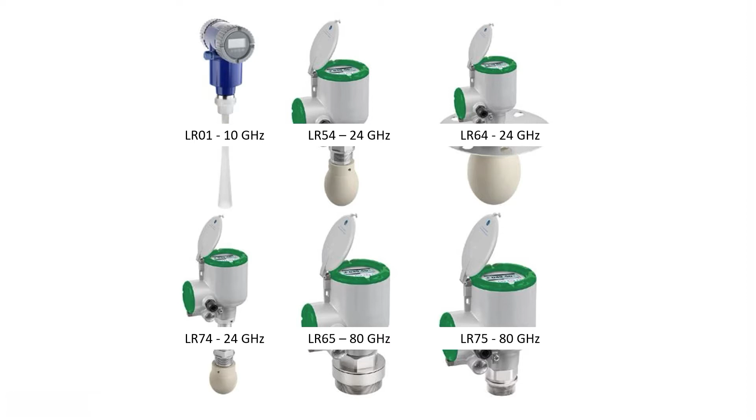Let's take a brief look at solving challenging solids level applications with Schneider Electric's LR64 and LR65 radar level controls. Why select either model for your application?

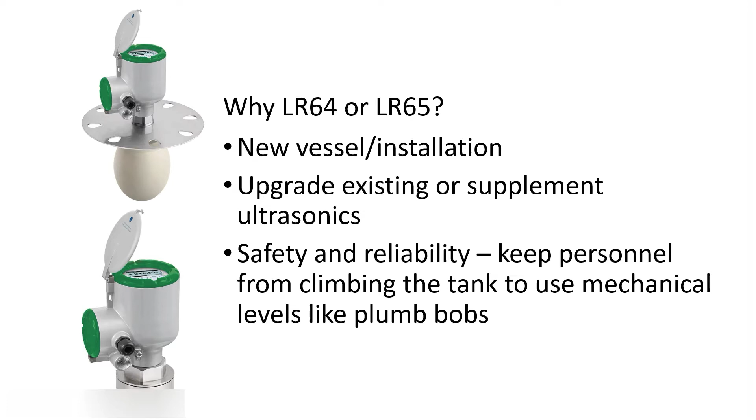Perhaps you have a new vessel? A desire to upgrade or supplement existing ultrasonics? Or for safety and reliability purposes, you want to keep personnel from climbing the tank to check level with a mechanical device. Both LR64 and LR65 use the powerful Frequency Modulated Continuous Wave, or FMCW, radar technology.

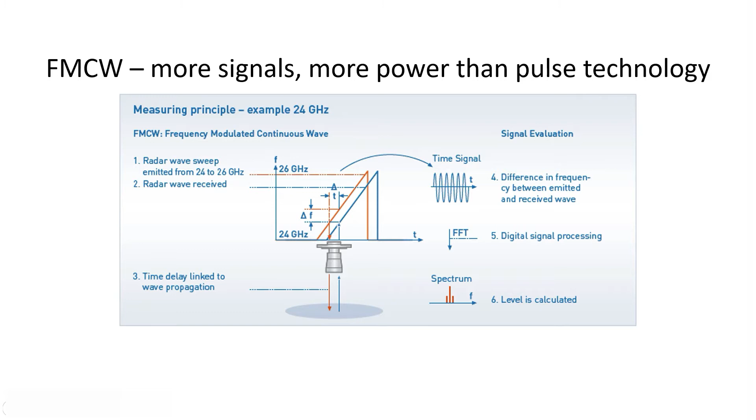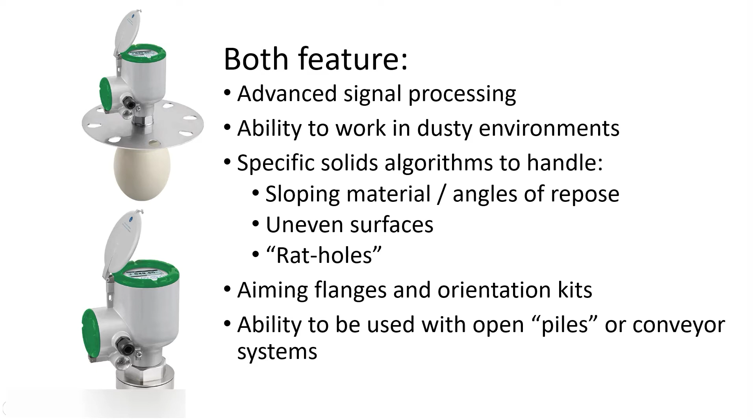Advanced signal processing and algorithms maintain accuracy despite dusty environments. A rugged design allows both models to be used in applications featuring product buildup, sloping material, uneven surfaces, rat holes, and other challenges.

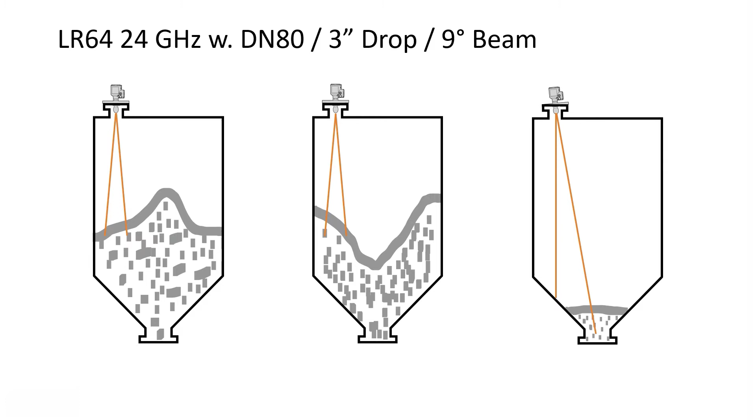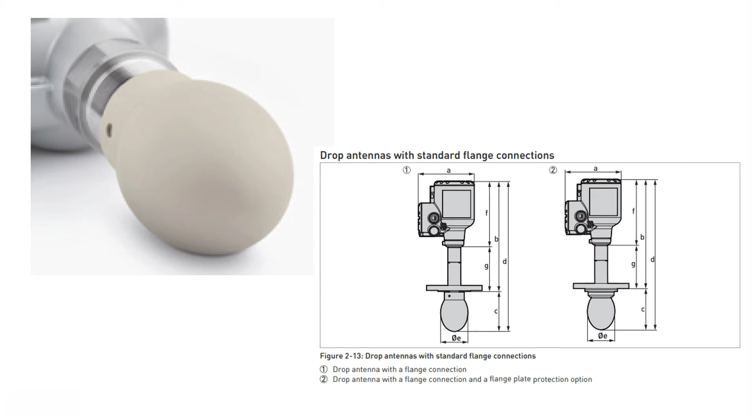The LR64's 24 GHz beam angle is ideal to sample a larger section of material. The drop antenna is unique. It features a closed shape with a non-stick surface made of polypropylene or PTFE. No buildup on the antenna surface eliminates the need for an air purge and extensive cleaning required by other antennas.

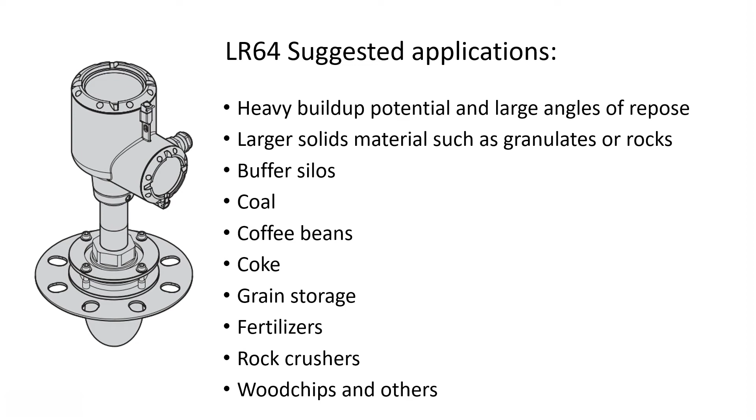The LR64 is ideal for installations featuring heavy buildup potential and large angles of repose. Suggested applications include larger solids materials, such as granulates or rocks, buffer silos, coal, coffee beans, coke, grain storage, fertilizers, rock crushers, wood chips, and others.

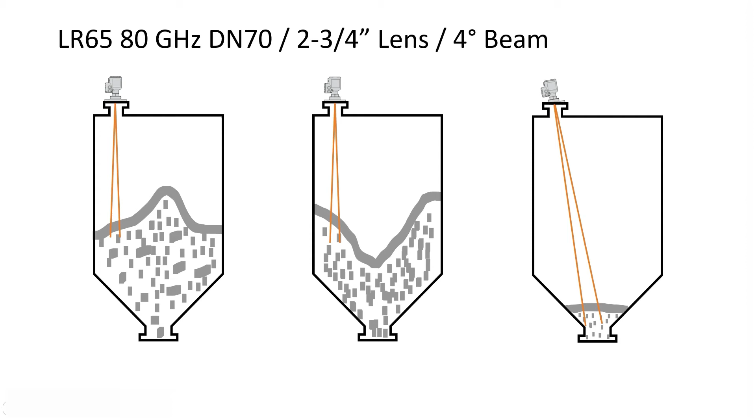The 80 GHz LR65 features a narrow beam angle which works well in low reflective media. The small beam angle eliminates false echoes, is ideal for measuring small particles, allows measurement down into the cone area of tall vessels, and ensures a strong reflection even off of materials with very low dielectric constants.

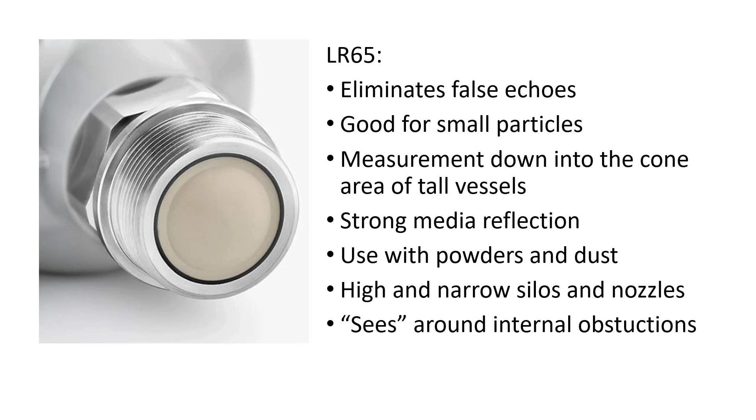The LR65 is ideal for installations containing powders and dust, high and narrow silos and nozzles, and internal obstructions. Suggested applications include bulk storage containers, cement, coffee powder, dry bulk solids, filler, flour, fly ash, gypsum, hot asphalt mix, iron ore, lime, milk powder, plastic pellets, plastic powder, polypropylene pellets, salt, sawdust, silica, sugar crystals, talc, and more.